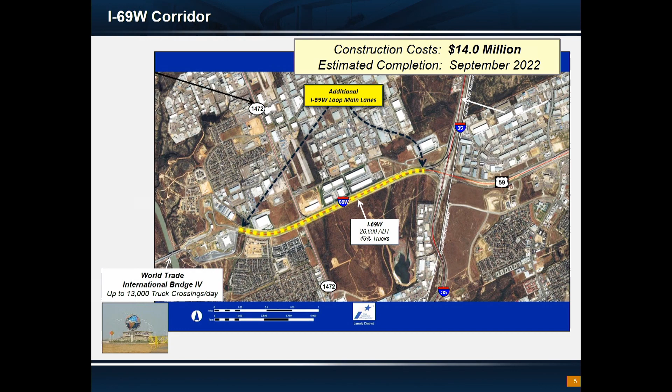That project will help ease traffic in and out of the World Trade Bridge faster on I-69. That project is $14 million and is set to be completed at the end of this month. Another major project, which I'm sure all of you have seen, North Laredo, is a $115 million project.

We are building a brand new overpass over the Union Pacific Railroad just north of Shiloh. And we're also building 2 direct connectors that'll help get you from east I-69 to south I-35, and west I-69 to south I-35. We're also adding a lane to I-35 as well.

In that area previously, you had 2 lanes in each direction, north and south. You're gonna have 3 lanes now in each direction. That's part of an initiative we have throughout the state called the Texas Clear Lanes Initiative, to take I-35 to 6 lanes throughout the whole entire state of Texas. So we're doing our part for our district.

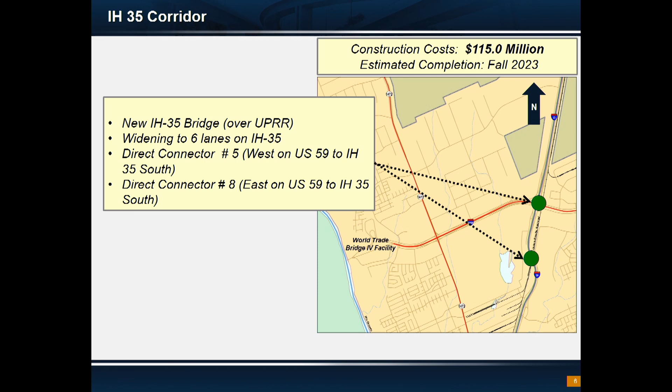Continuing, so again, that is what's under construction. Now, what do we have in the future, which is I think really the reason why you asked us to come up here. Yesterday, we just got signed into effect the 2023 Unified Transportation Program. For those of you not aware of how TxDOT operates, we operate in a 10-year planning window.

That 10-year Unified Transportation Program allocates all the funds we have designated throughout the state, designated to all our projects. Basically what that plan highlights is our major mobility funds that are on there. And I'm gonna talk about some of the projects here in Laredo that have already received those funds. If you look at it, in Laredo alone, $1.7 billion for the next 10 years.

That is an all-time high for the Laredo district, the highest number we've ever had for the 10 years. And $660 million of that is gonna be in Laredo and Webb County in the next 4 years alone.

So what I'm gonna show you again, this is just a disclaimer. Obviously we're gonna show you lead dates, construction estimates. All these are always subject to revision. We understand the dynamic environment with the economy, right? So these are our projections and what we're planning towards, but again, they are always subject to revision.

So the major project we have, I know it feels like we've been talking about this forever, is the US 59 Future I-69 corridor. This project is taking Loop 20, which everybody knows is US 59 as well, to interstate standards. What does that mean?

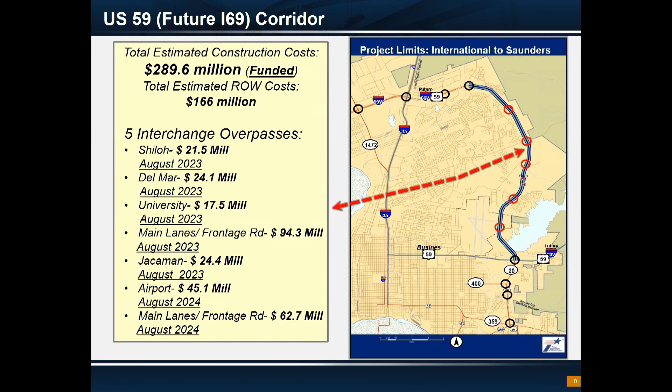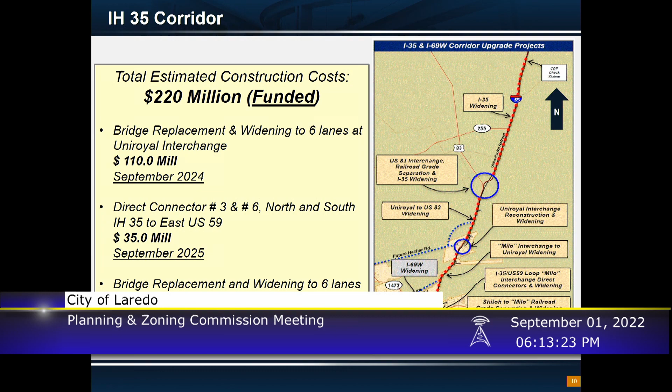We're going to build a brand new interchange a mile and a half north of there, where you'll see the future Hachar-Reuthinger relief route. It's a relief route with controlled access, and I'll show you that. That interchange will connect that area and hopefully provide relief as it continues to expand and grow.

We have the direct connectors 3 and 6. I use the word spaghetti bowl because somebody said that the other day and it just sounds cool. That spaghetti bowl of I-35 and Loop 20, you see all those direct connectors. We currently have 3 built, and we're in the process of building 2 more that I just mentioned, which will give us 5. There are 8 in total.

These are the 2 that are funded, and there's 1 currently not funded. Those 2 will take you north and south, I-35 to East 59, that's 35 million. The last one currently funded on 35 is the bridge replacement and widening to 6 lanes at the Union Pacific Railroad, mile marker 18.

That's where the old Tourist Bureau Center is. Right now you have to go through that little S-curve and down around that overpass. We're going to relocate that overpass to the northwest, and go over the railroad instead of under. The current underpass you pass through will get filled in and no longer exist - we'll remove and obliterate that.

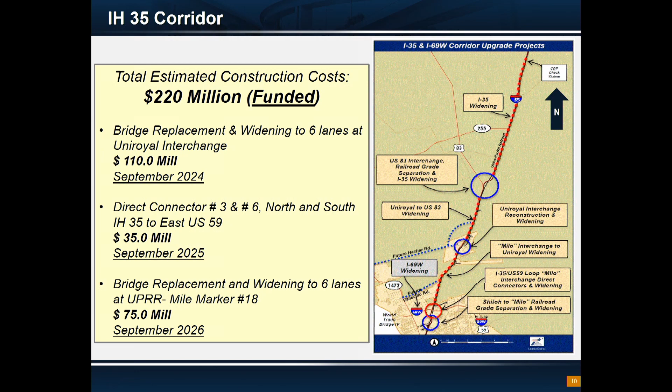Let me ask you a question before you go further. Yes, I know you mentioned the construction of the interchange at, what is it, the Hachar-Reuthinger.

The interchange, from Uniroyal, is about a mile and a half north, right? More or less? So looking at Uniroyal to the Hachar-Reuthinger and north, can you help me out - what's the distance between there? Because you have the unnamed intersection, and then another from Hachar, so it's more than that, about 3 miles, what is it? You mean from Uniroyal to the Hachar? To the Char, yeah, that's about 2 miles. Okay, about a little more than 2 miles, yeah.

Okay, so if we're coming out, there's already congestion big time over here at the Uniroyal, that's going back out to 35. So how are you going to add a lane or lanes to get that traffic to that interchange, or what is the plan?

Yeah, so we actually just had a meeting with one of our consultants. We have a schematic where we're analyzing the entire I-35 corridor, all the way up to mile marker 30, looking at those capacity issues - how we're going to service not only the development that's there, but upcoming development in the future.

So just to answer your question, I'll take a quick step back - that interchange is eventually going to look like what I-35 and I-69 looks like. So the interchange we're building is not a simple interchange like you see at Uniroyal currently. We're building a full-blown interchange that's going to connect basically 2 interstates.

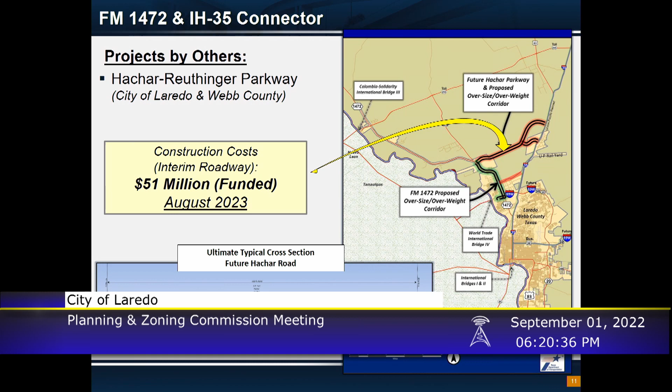That's a good question, something we've always looked at. And I'll tell you it's not an easy solution. I'll speak here on behalf of TxDOT, and this is based off numbers and what we've seen. Everybody knows that the choke point is Killam. If you look at the numbers, if you look at where the traffic backs up, everything backs up at Killam.

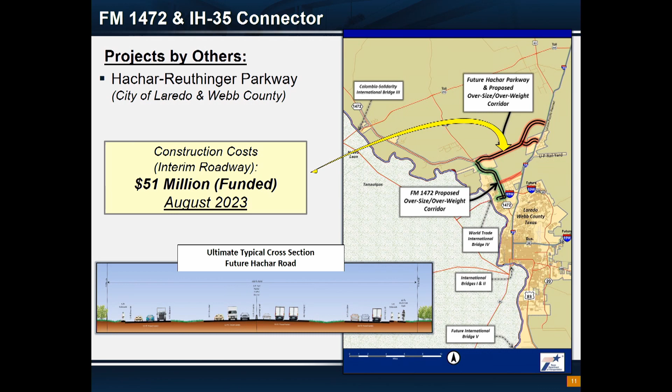So what are we doing? We currently have a project under construction that's adding a right turn lane from Big Bend, which is just south of I-69, on Mines Road, all the way to Killam. That lane is gonna be a continuous right turn lane that'll allow access not only to Milo Road if you're heading north, but also to Killam. So that's gonna provide free access in there.

We're also adding a right turn lane on Killam. So on Killam, if you're coming out going to the west, you're gonna have now a free right turn to go out.

Once that project is completed, you're going to see traffic moving through there a little bit smoother, but there are going to be other projects that we're going to have to continue and follow up with to improve the operations at that area, because right now Killam is the choke point that's occurring.

Have you guys considered or looked at just having an expressway over Mines Road to connect to the World Trade Bridge, to maybe alleviate that problem, where you can just have truck traffic going and coming on an upper surface or whatever?

So we have looked at that. I will say that if you look at the North Laredo traffic study that the RMA and HNTB did, that was one of their suggestions. I will tell you there are challenges.

When you start considering a freeway, one of the things is lack of access. You would have to decide where and when to begin that freeway, and after that you wouldn't really have access to get onto it, because you'd have to be pretty high up in the air to get over I-69 and come down to tie in before you get to the bridge. But I will follow up with the solution we're looking at, or the alternatives, is how can we get other access points to the bridge.

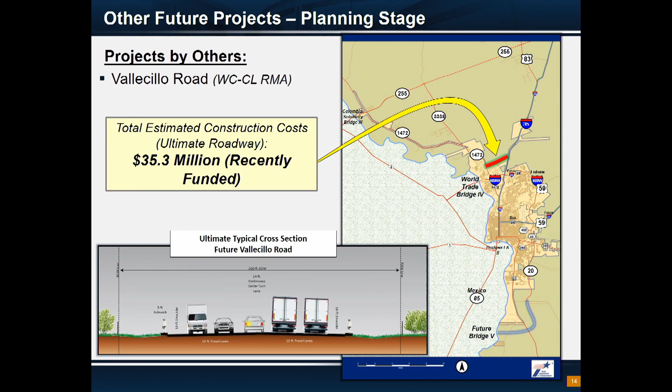So that project, again, we don't have a letting date yet. That is being managed by the RMA, so we can come back to you later with more information on when that project will be ready to go to construction. And then the last project I wanted to talk about, and this is probably where everything started at the last meeting, was Lomas del Sur, right?

Everyone was talking about that. So I kind of ended with this one on purpose, so everyone could be listening, paying attention, waiting for this. The Lomas del Sur project actually did get funded.

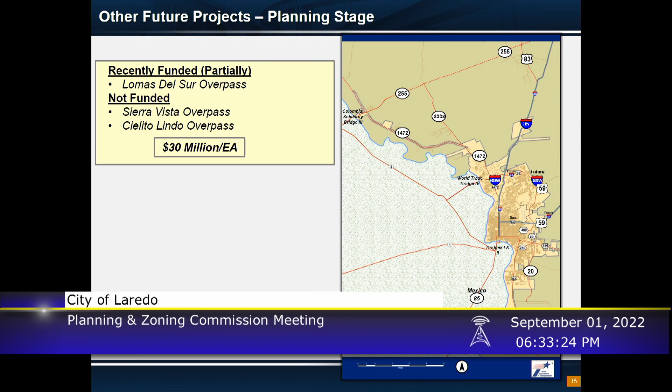We have $23 million of Category 2 assigned to it. The estimate we have right now is currently at $30 million, so we have about a $7 million shortfall. We are going to be looking this year for alternatives to fund that gap, but we're not going to wait to get that project going. We already have a consultant on board. We had the kickoff meeting last week, and they're starting the plan development for that project.

And as soon as we can have it ready and the final bit of funding can get secured, we can let that. If you ask me, we're going to try to let it as soon as possible. Our goal is to try to let it by FY25, latest FY26 in that area.

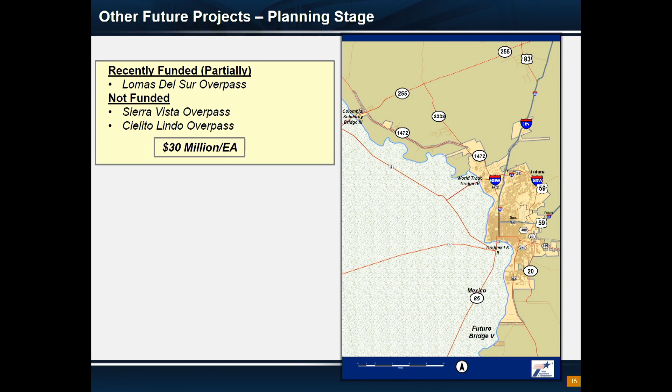The other two overpasses, Sierra Vista and Cielito Lindo, were not funded yet, but we're also going to be preparing the PS&E, so the plans will be ready on the shelf, ready to go.

Good. And that ends my presentation. I know it was a lot of information, but does y'all have any other questions?

You're gonna elevate the intersections at Cuatro Vientos by bridge? That is correct. If you look at those intersections, it was open, but unfortunately, based on the accidents that continue to occur, we closed the road. But we did add turnarounds, acceleration lanes, deceleration lanes, to give people options, and we added safe lanes.

And yet, we still see accidents out there, unfortunately continuing to happen. The saving grace for this project is once you have an overpass, all that high-speed traffic will eventually stay on the overpass, and then you have the slower traffic on the side.

I know that Lomas del Sur is a priority because of the sports complex, which is why we really pushed for it to get funded, and it did. So we'll be moving forward with that project and hopefully letting it here soon.

Excellent. I have one last question. The 10-year plan, the funds that you have for the 10-year plan, how much of that funding is for increasing lanes on I-35 going north?

If you look at the I-35 corridor, right now we have $220 million funded on I-35. So of that 1.7 billion, 220 million is on 35.

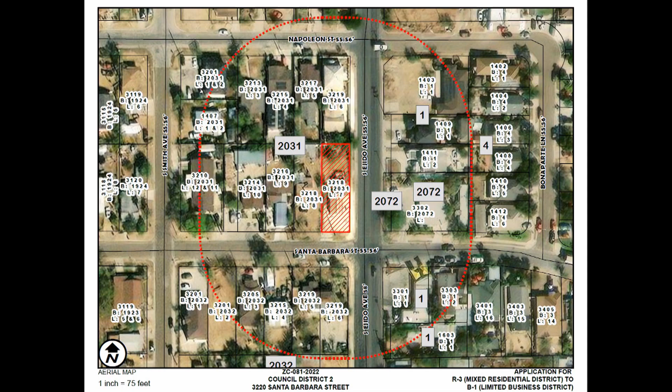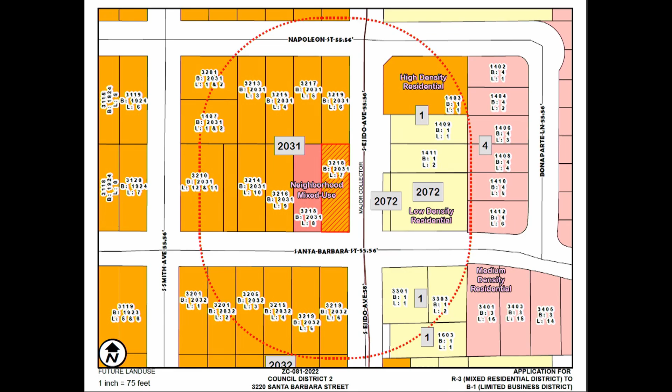Aerial view. Street view. Zoning map. Future land use map. And the recommendation is staff supports.

And the proposed motion. Okay, thank you. This is a public hearing. Anybody who wishes to speak in favor?

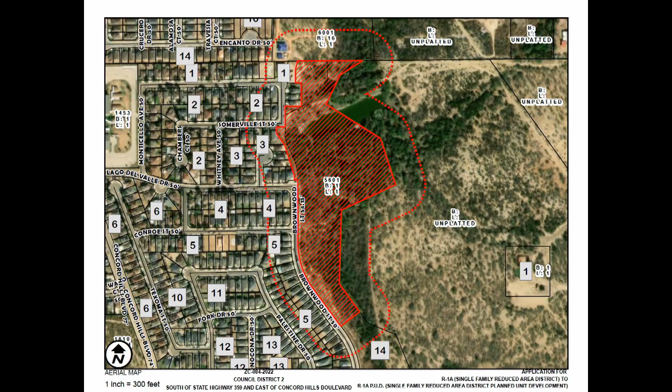Anybody have any questions for Mr. Garza? No? All right, I move to approve.

Just a minute, this is a public hearing, right? Yeah, you got it. Thank you very much, Mr. Garza. Does anybody else want to speak in favor of this R1A PUD? Anybody who wishes to speak against the R1A PUD?

All right, wishes of the commission. Move to approve, Dovalina, second by Narvaez. All those in favor signify by saying aye. Aye. Those against, motion carries.

Thank you. The next item we have is review and consideration of the following master plans. Review and consideration of the Monteverde subdivision master plan. The intent is residential and commercial.

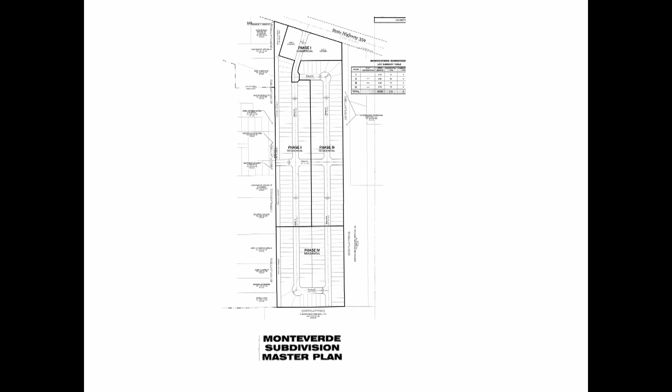Location view, aerial view, street view, the proposed master plan, comments from planning, traffic safety, and the proposed motion.

Good afternoon, Mr. Chairman. Wayne Nance with Porras Nance Engineering. We agree with all the comments that staff has. Are we any here for questions for the engineer?

So you've already talked to TxDOT? Absolutely, we met with TxDOT a few weeks ago and they acquiesced to the entrance. Yeah, I think we all agreed. Yeah, we agreed, we talked with it. Do you have LUEs? I'm sure we do. We'll be talking about it more when we go through the one-stop shop.

Okay, any other questions? Thank you very much, Mr. Nance. What are the wishes of the commission? I'll make a motion to approve, subject to the comments. We have a motion, second by Daniela. All those in favor signify by saying aye. Aye. Those against, motion carries.

Next item, review and the revision of the Las Adelas subdivision master plan. The intent is residential and commercial. The purpose of this revision is to combine portions of phase 2 and phase 3.

Yes, Mr. Chairman, for the record, applicant is Garrett Ford Hopper, engineer is KCI Technologies, proposed use is residential and commercial. The zoning for this 474 lot development is B1, R1, and R1MH.

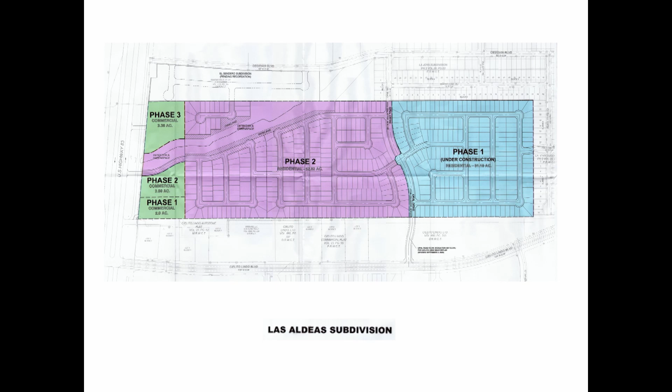Location view, aerial view, street view, the revision of the master plan, comments from planning, traffic safety, and the proposed motion.

Mr. Chairman, Jeff Puig, KCI Technologies, members of the commission. We agree with the comments and have no objections to that. Here to answer any questions if you might have. Does anybody have any questions from the commission?

Are you crossing the road? Is the access road still there? The old frontage road, the intent in working with TxDOT is to remove that portion of the old frontage road along our frontage portion, and we will be looking at a right-in, right-out connection to 83.

Any other questions from the commission? Thank you very much. What are the wishes of the commission? Move to approve, Dovalina, second by Daniela. All those in favor signify by saying aye. Aye. Those against, motion carries.

Next item, consideration of the following preliminary plats and preliminary replats. Preliminary consideration of the plat of the Coves at Winfield, Phase 10A. The intent is residential.

Yes, sir. The applicant is Killam Development, engineer Mesquite Engineering. Proposed use residential. The zoning for this 4-lot development is R1.

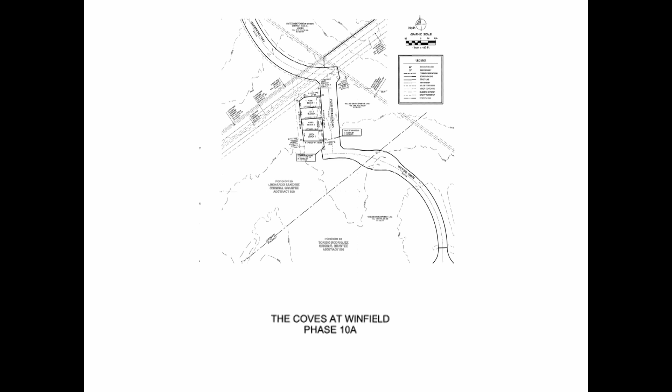The location view, the aerial view, proposed plat, staff comments, planning, and traffic safety, parks and leisure, proposed motion.

All right, on there? Yes, sir. Good evening, Commission. Vince Martinez with Killam Development and Representative Mesquite Engineering. We concur with the comments minus the comments from traffic.

All of the existing roads in this area were approved as part of Phase 1 and Phase 2 and have been installed, so we wish to strike out that comment. So you're saying you don't want to concur with the handbook which says the speed limit is 30 miles per hour? Well, they've already been installed. The road's done, is that what you're saying? Yes, the roads are done and installed already. Okay, well let me call our traffic engineer up to see why the comment's here.

Good afternoon, Robert Peña, City Traffic. I have to agree, we can't argue that. This has been long ongoing, and the road's in, it's done.

So will it handle 30 miles an hour or not? Yes, it will handle it. So why do you object to the comment? Well, if it handles 30 miles an hour, why do you want it removed? Because we don't have to make any changes to any of the existing roads if it comes up during the one-stop shop process.

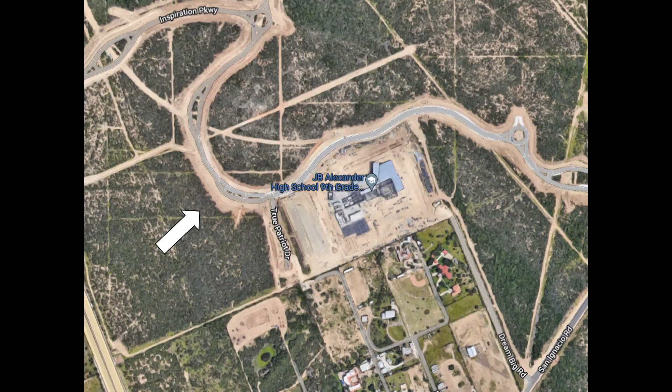Location view, aerial view, street view, proposed plat. Staff comments: planning, traffic safety, parks and leisure.

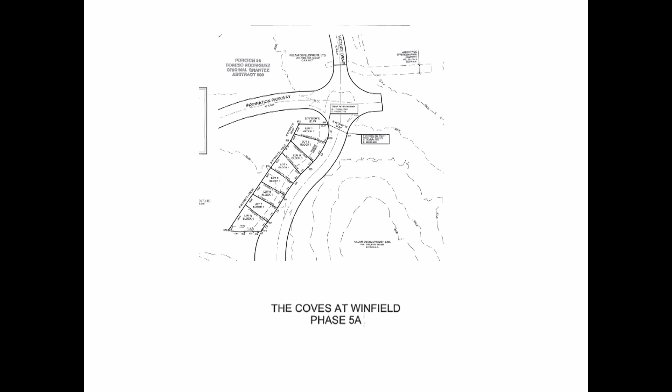Street view, proposed plat, staff comments: planning, traffic safety, parks and leisure. Proposed motion.

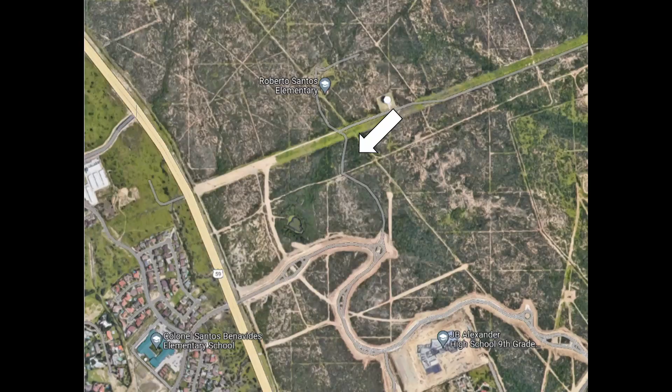Next item is preliminary consideration of the plat of the Coves at Winfield, Phase 6A. Applicant, Killam Development, engineer, Mesquite Engineering, proposed use residential. The zoning for the 7-lot development is R1. Location view, aerial view, proposed plat, staff comments, planning, traffic safety, parks and leisure, proposed motion.

Move to approve subject to the deletion of traffic comment. Motion by Molina. Second by Daniela. All those in favor signify by saying aye. Aye. Those against? Motion carries.

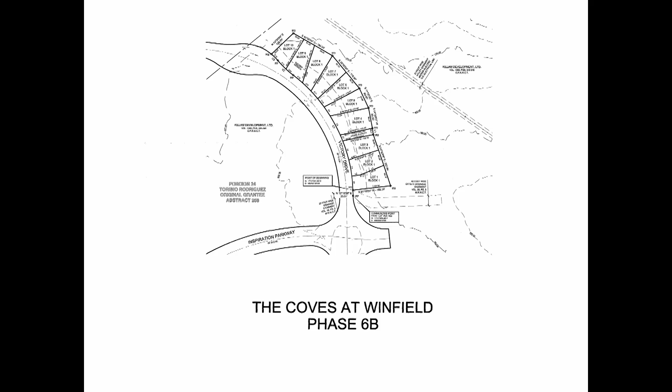The next item is preliminary consideration of the plat of the Coves at Winfield Phase 6B. The intent is residential. The applicant is Killam Development, engineering, Mesquite Engineering, proposed use residential. The zoning for this 10-lot development is R1. Location view, aerial view, street view, proposed plat, staff comments, planning, traffic safety, parks and leisure.

Proposed motion. What are the wishes of the commission? Motion to approve, deleting and changing traffic comments 1 and 2. All right, I'll second it. Second by Ana. All those in favor signify by saying aye. Aye. Those against? Motion carries.

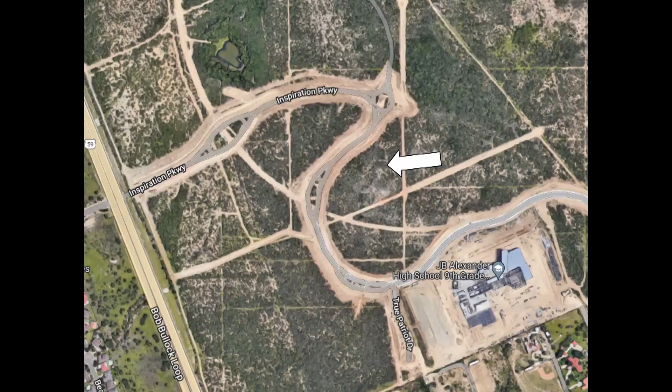Next item, preliminary consideration of the plat of the Coves at Winfield Phase 7A. The intent is residential. The applicant is Killam Development, engineer, Mesquite Engineering, proposed use residential. Zoning for this 8-lot development is R1. Location view, aerial view, street view, the proposed plat, staff comments, planning, traffic safety, parks and leisure.

Proposed motion. I'll make a motion to approve, removing traffic safety comments 1 and 2. Second. We have a motion, we have a second by Molina. All those in favor signify by saying aye. Aye. Those against, motion carries.

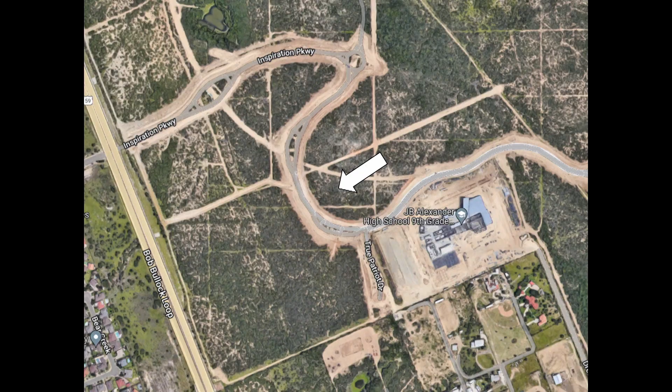Next item is preliminary consideration of the plat of the Coves at Winfield Phase 7B. The intent is residential. The applicant is Killam Development, engineer, Mesquite Engineering, proposed use residential. The zoning for this 6-lot development is R1. Location view, aerial view, street view, proposed plat, staff comments, planning, traffic safety, parks and leisure, and the proposed motion.

Motion to approve subject to deleting traffic comments one and two. Motion, we have a second. Second by Daniela. All those in favor of the motion signify by saying aye. Aye. Those against, the motion carries.

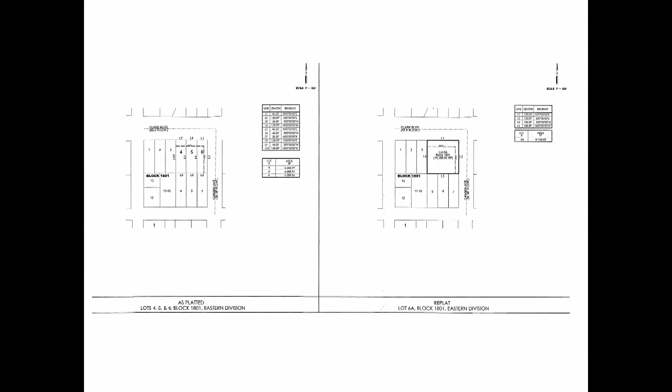Next item is preliminary consideration of the replat of lots 4, 5, and 6, block 1801 Eastern Division into lot 6A, block 1801 Eastern Division. The intent is residential. The applicant is Maria G. Treviño and Hugo Gilberto Garcia Guerra, engineer Ricardo Ramos. Proposed use residential. The zoning for this one-lot development is B1. Location view, aerial view, street view, proposed plat, staff comments planning, proposed motion.

Good evening, my name is Ricardo Ramos, and we agree with staff comments. Does anybody have any questions for the engineer?

Do you know what's gonna go there? It's an apartment complex, and the reason we're trying to replat it is because the sewer line is in one lot and the water line is in the other lot. So the apartment is on that corner lot, and they need to service the sewer in one lot. So they have to make all three of them one lot. If that makes sense.

So you have three lots, right? Yeah, and the apartments are built on one lot. So that lot services the water, but they got the sewer from the adjacent lot, and connected it to the apartments. So now you have the sewer from the next door neighbor feeding this lot. Okay, yeah, I got you.

There was a Y there. Yeah, I got you, okay. All right, any other questions for the engineer? All right, thank you.

What are the wishes of the commission? Motion to approve. We have a motion by Anna. Second, a second by Daniela. All those in favor signify by saying aye. Aye. Those against? Motion carries.

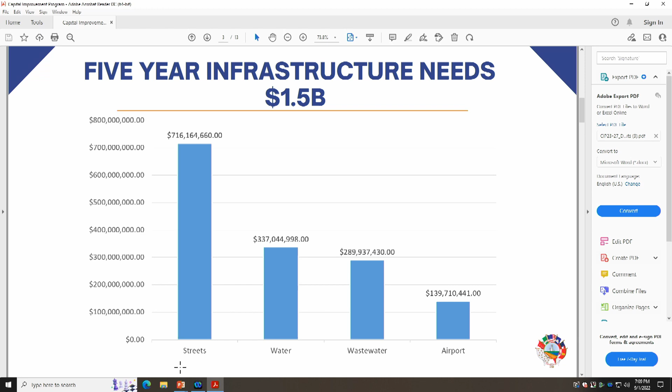This is the breakdown by department, as I say, street, water, airport, wastewater. In 2023, this is about $933 million. Of course, the majority of what TxDOT just presented is the TxDOT projects, and the second one is water and wastewater.

We did present to council - this year we are looking at about $31 million bond sale. So we are proposing $250,000 - this is not their priority fund, we're putting it as a CIP so the council will come up with one or two projects on their district, and so we'll spend that. That's about $2 million. We are proposing about $1 million.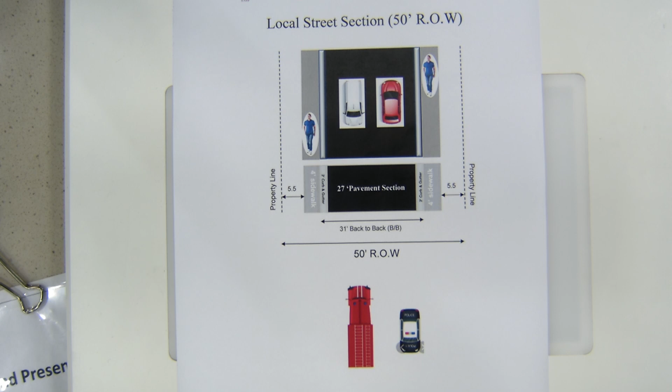So that having been shown, that's something that's stipulated in the ordinance. That's something that we as the city, or the engineering department, cannot change on our own. Now, I was told a recommendation was made, maybe not to change everything, but to amend it to put everything to a 60 foot right-of-way and 41 foot back-to-back.

Now, if that was the case, again, one of the things would be having to go through the city ordinance and amend that, change it. However, one of the things we see in the engineering department is that if you were to change this, it could cause a chain of effects.

For example, extra runoff in the sewer that maybe isn't accounted for, but now we'd have to account for, which is going to translate into more storm sewer, which at the end of the day developers are going to have to make larger ponds, larger storm drainage, and that's extra cost, which at the end of the day could go onto the residents that might buy homes in those areas.

Also, another thing we might see during the design phase of the subdivisions is that sight distance problems could arise.

Another thing could be lowering the square footage of the lots, because at the end of the day you're sacrificing extra right-of-way for the emergency vehicles. We understand it's for emergency vehicles, but at the end of the day you're also sacrificing the cost for the residents that could actually buy a house in that area.

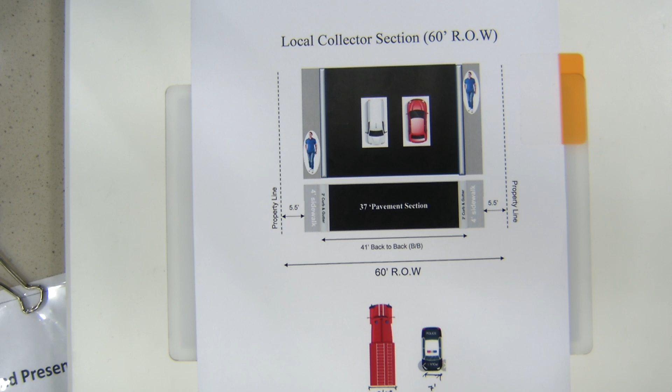Now, what else can we do for the city of Laredo if we have a situation where emergency vehicles do not fit? By the way, the general width of a fire truck is about 8 feet 4 inches. However, it does require sometimes to have—if I'm not mistaken, the Chief can also speak to this—but it says we usually need 20 feet of unobstructed access road for emergency vehicles.

So one of the things we can maybe look into is enforcing residents not to park in areas where emergency situations are likely, or just having residents reduce the number of vehicles parked on the street, which I understand will be difficult, but those are some things we see right now. Of course, there's more to this aside from what I just mentioned, and this is just a brief description of what's going on.

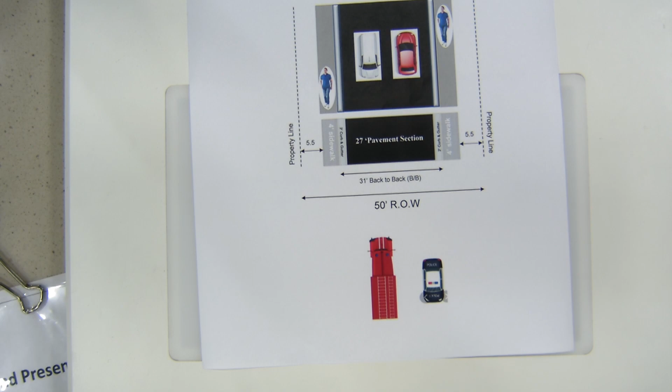I think part of the problem is that people have complained about the number of vehicles on a 31 foot back-to-back street, and each car is at least 10 feet wide, so you have both cars parked on either curb.

So you only have 10 feet left for them to travel up and down, and they currently have a great deal of congestion as they go forward. What they want is to have 2 lanes so that they can move their cars, because it's conceivable in this day and age that each person in a couple that lives in a house works, so they have to have a car. They don't have enough parking to park both cars in a driveway unless you make the whole front of the house a driveway, so they have to park a car on the street. The same thing goes for the other neighbor, so then you have a problem with them being able to circulate.

Yeah, and we understand that we can look into other options to try to resolve the situation. One of the things is changing the ordinance, but I know that will be a big hurdle, plus all the reasons I've just provided. Regarding zoning, that's something Mr. Navarro could speak about. I understand that nowadays both the wife and husband have to work due to the economic situation in the United States, so some couples have more than 2 cars, maybe 3, and they park on the streets. It's a complex situation, and in order to solve it we need to look into more options. For right now, I think the solution is just enforcing, but if we want something long-term, we need to look into more options.